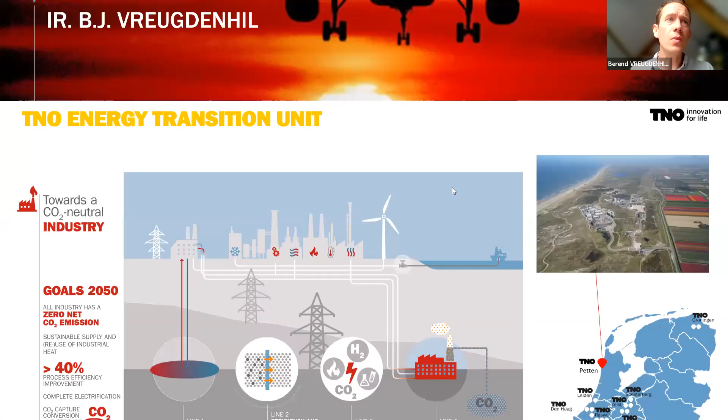One slide about TNO. TNO is a very large research organization, the largest in the Netherlands, focusing on many topics. My group is part of the energy transition unit, where we focus on a CO2 neutral industry via various lines within my group, which is located in Petten. Within the flower fields, we focus on using biomass to replace fossil resources, and this can be in the form of heat, fuels, and chemicals.

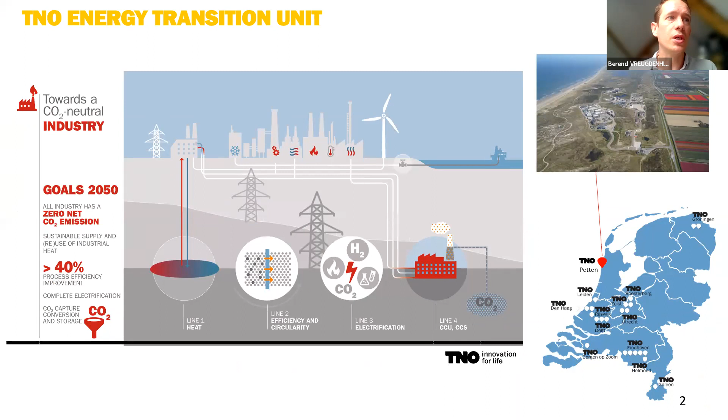So, as I said, the topic of today is gasification towards Fischer Tropsch. Gasification is, I believe, a workhorse for the energy transition. IEA Bioenergy published a report at the end of last year where we investigated how gasification can be applied in existing infrastructures, so existing industries, to convert them into biorefineries, utilizing their own waste streams, co-producing additional products. And one of the proposed pathways there is a Fischer Tropsch pathway.

But it's a key technology in utilizing all kinds of undervalued resources, from agricultural waste and forest residues to municipal solid waste and even plastics. It can be applied in many different industries: power generation, refinery, steel making, but also for fuels and chemicals. We believe that gasification is a crucial technology in reaching large shares of green gas in the European gas infrastructure, which is really a hot topic today.

As a technology, it can also be used for developing the bioeconomy, where you focus on using biomass to produce fuels, chemicals, energy, but also the circular economy. When you talk about municipal solid waste, you take in plastics, and gasification allows you to convert plastics back into the building blocks of plastics, so you can make virgin plastics again. And the last topic, it's also a key technology in the production of sustainable aviation fuel, SAF, via the Fischer Tropsch pathway.

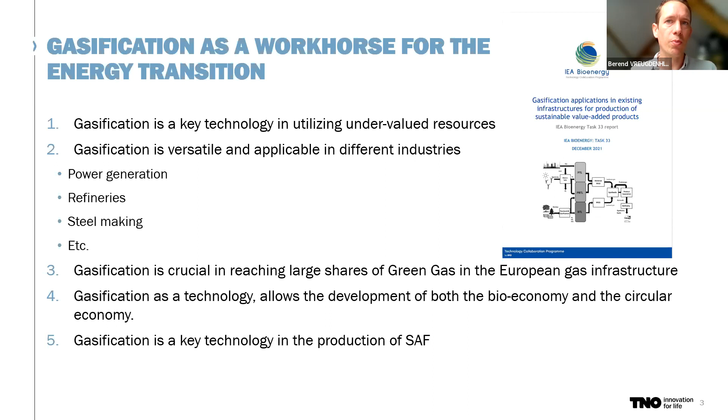I think many of you will understand the problems we're facing with making all these sectors renewable or sustainable. There's a huge challenge there, especially in the hard to abate sectors like aviation. It's very difficult to supply SAF in substantial quantities. The report in the top right is written by my colleagues from TNO. Basically this also underlines the importance of biomass approaches, not only to supply sufficient quantities of fuels like Fischer Tropsch, but also to be cost effective.

They evaluated the various routes and compared biomass pathways to power to X, so using renewable energy, and compared it to fossil-based products. It's a very nice report. But what it states is that e-based systems tend to be 2.5 times more expensive compared to bio-based routes. So making all these products from power to X is going to be very costly, and the sustainable electricity is not yet there. So that's a huge challenge.

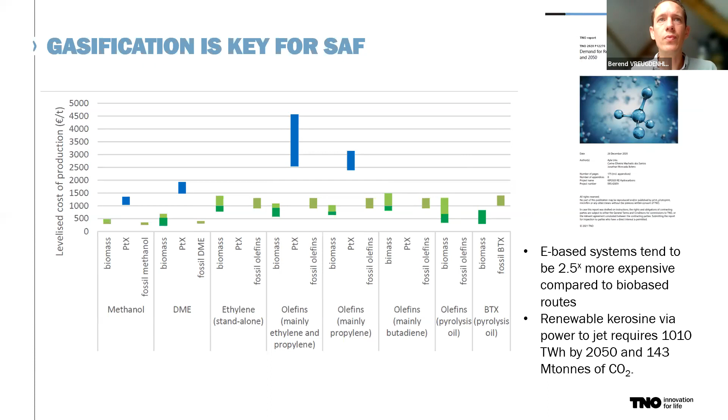It also mentioned that if you want to make renewable kerosene via the power to jet pathway, you would require 1,000 terawatt hours by 2050 and 143 million tons of CO2, which is also a substantial amount. And the good thing is, in biomass, you have both a lot of carbon and a lot of hydrogen. So it's an excellent pathway to go to Fischer Tropsch.

So going into the project, what I will be presenting is part of the BECOOL project. It's a collaborative project between the EU and Brazil. It's ending at the end of this month. What we looked at in this project with all the partners is the growth and cultivation of biomass, the harvesting, the logistics to get the feedstock to a plant, and then the thermochemical conversion via pyrolysis or gasification to go to Fischer Tropsch.

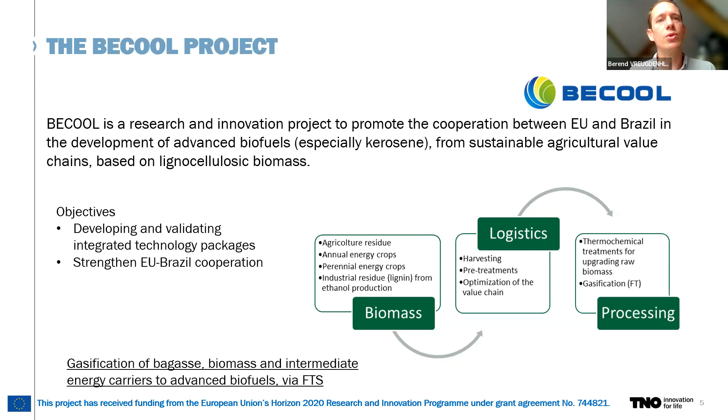We analyzed this with models, but we also supported it with actual testing in the fields and also in the lab with gasification tests. And TNO was part of the group that was looking into this thermochemical conversion, where we actually showed that you can convert biomass into Fischer Tropsch products, and the results were also used to validate our models.

So what did we do there? We had several routes that we looked at in the project. So pyrolysis, producing a liquid, and then high temperature gasification to produce syngas. But at TNO we have an indirect gasifier, which is more medium temperature gasification, and we focus on utilizing the biomass directly, making a product gas, so not a syngas. It's rich in tar and methane.

And then after removal of impurities with tar removal or a water wash and hydrodesulfurization, we would go to a steam methane reformer. So make syngas out of the product gas, remove the CO2, and go to Fischer Tropsch, where we produce the liquids. The economics, as calculated by IEA back in 2019, would be between 20 to 40 euros per gigajoule. And in our approach, we reached the high end of that specific range, and that's without any learnings so far.

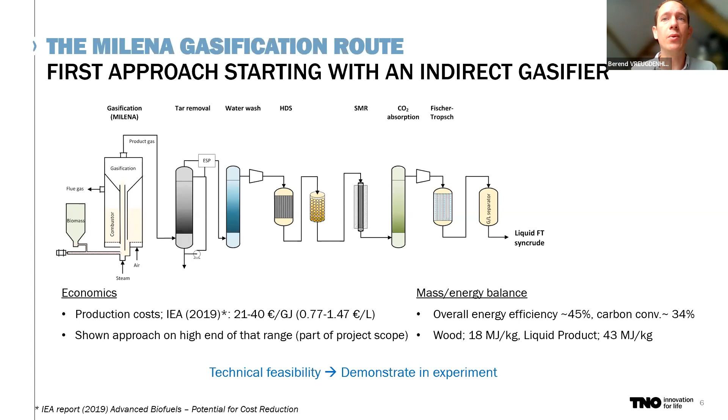Looking into the mass and energy balance, the overall efficiency is about 45%, and the carbon conversion 34%. And this is quite typical for Fischer Tropsch processes. So what we did is we demonstrated with experimental work that it's feasible, that it's possible to do this, and it's actually quite unique. So I will show you the lineup that we have.

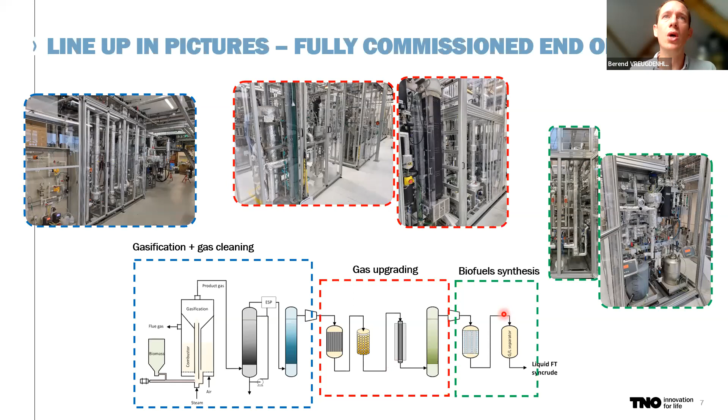Part of it was existing equipment, so the gasification and the gas cleaning and part of the gas upgrading, but everything from the steam methane reformer from this point forward, the CO2 scrubber, and the high pressure fuel synthesis, that was all newly built and fully commissioned by the end of 2021. So it wasn't tested before. And within the BECOOL project, we actually had 2 weeks of running an experiment to demonstrate this.

So what we did there, with quite a big team of people, we gasified first beechwood, which is our standard starting point. So we operated the gasifier, and in the meantime we prepared the upgrading, so the cleaning and the conversion, the steam methane reforming, CO2 scrubber, in order to get a syngas of good enough quality. And at the same time, we were starting up our fuel synthesis part with gas from the grid, and eventually we connected it to our gasifier, so on biosyngas, and demonstrated the feasibility.

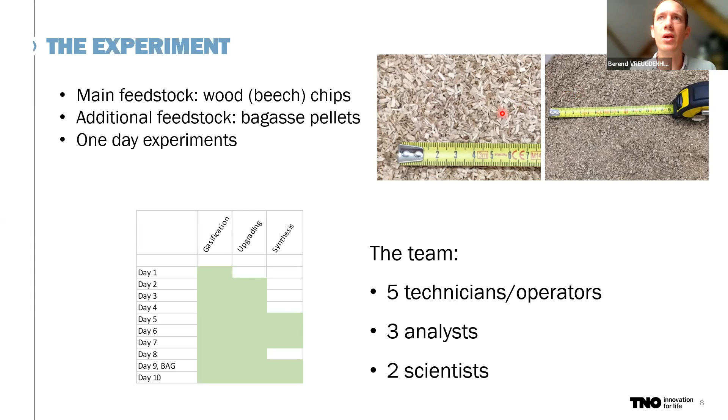Then part of the collaboration with Brazil was also to look into bagasse, which is an abundantly available feedstock in Brazil. And we had some pellets available, and on the 9th day we operated on bagasse and demonstrated that it's also feasible to use bagasse as a feedstock. And you can see in the top right the quality of the feedstock, or the sizes, and that's typical for our lab scale experiments. You need a good size of feedstock in order to be able to feed it.

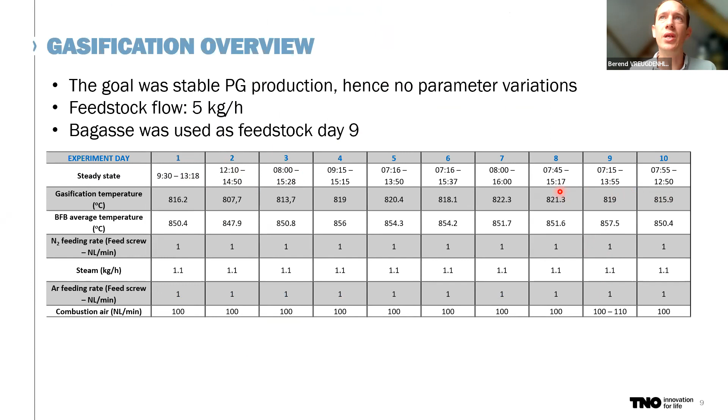So here you have an overview of what we were doing. You see some days were longer, some days were shorter. Sometimes you run into problems and you have to solve those. Typically every day we operated on 5 kilograms per hour, and on the 9th day we ran on bagasse pellets. Our gasification temperature is roughly around 820 degrees C. And we try to keep everything constant for the duration of the 2 weeks.

So this is some of the results on gas upgrading. You can see after tar removal, so Milena, Olga, after tar removal, you see a typical gas composition. It's rich in CO, hydrogen roughly 20%, and there's still some toluene and benzene in there, and ethylene is quite high. Then after the gas cleaning, which is the hydrodesulfurization and sulfur removal, what you see happening is all the unsaturated hydrocarbons get saturated, so the ethane content increases.

There's still some benzene and toluene in there, but after the methane reformer, where you make syngas, all these components are destroyed and syngas is produced, after which we remove the CO2 in order to have just the syngas going into the Fischer Tropsch. And you see the CO2 is completely removed in this case.

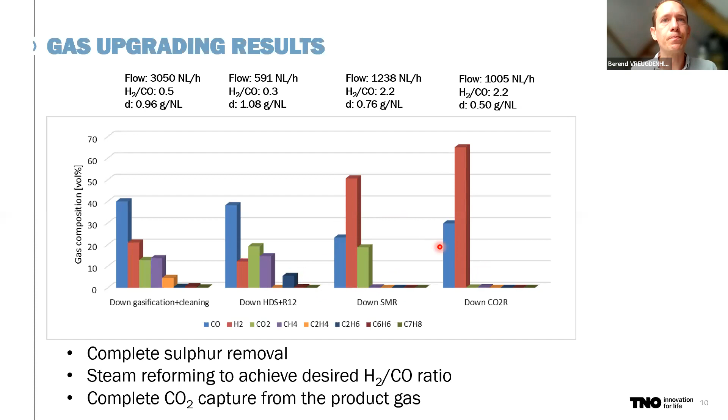So going into the Fischer Tropsch pilot unit, it's a reactor of 2.5 meters long with an internal diameter of 26 millimeters. It's externally controlled with a thermal oil because of the exothermal reactions taking place. Roughly about 1600 grams per hour of gas was going in, starting with the gas from the gas panel, and then later switching to biosyn gas.

And you can see at the bottom left the pictures, the Fischer Tropsch catalyst, which is a low temperature cobalt catalyst, and the silicon carbide pellets, which basically form the inerts at the inlet to get a good distribution and heat up of the system. And it's also mixed with the catalyst throughout the length of the reactor in order to mitigate all the exothermal reactions. If you would only have catalyst, then you would overheat at one point and probably melt your catalyst straight away.

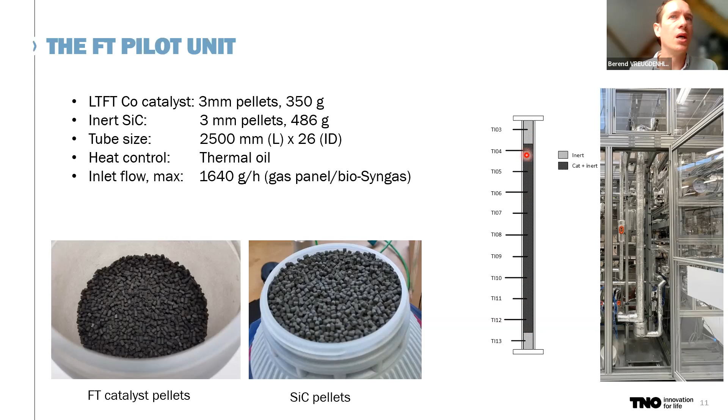Here you have some of the results on the 6th day. You see all the thermocouples, and it's going up. And when the gas goes in, you see exothermal reactions taking place with these peaks, and sometimes very high. And this is an effect of a change in gas composition, but also a change in pressure. So every time you increase the pressure in order to reach your higher pressure for your process, you see also that there's an additional thermal effect because more heat is developed locally with a compressed gas. So far, what we've seen is that the tests were running best at 8 bar G and roughly 200 to 220 degrees C.

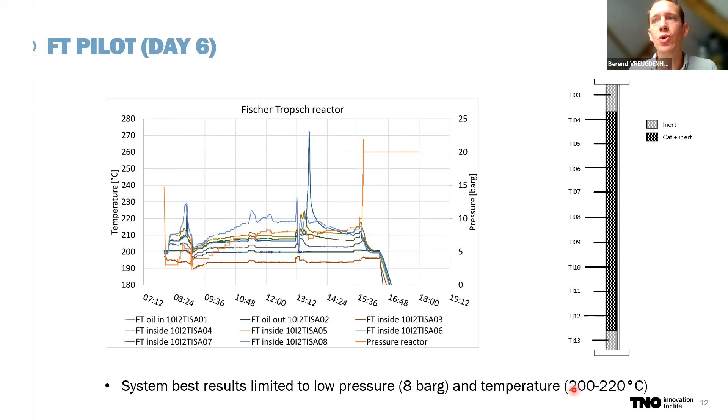And this is a little bit on the results. So we produced 3.5 liters of liquid/wax hydrocarbons. There was 600 grams per hour biosyn gas going in with a typical CO conversion of 34%. If it would be higher, then you would have a lot more heat developed, and you probably would need a different reactor type. The selectivity to C5 plus was about 80%, and methane was still quite high, but it's because the catalyst we used had a relatively low alpha.

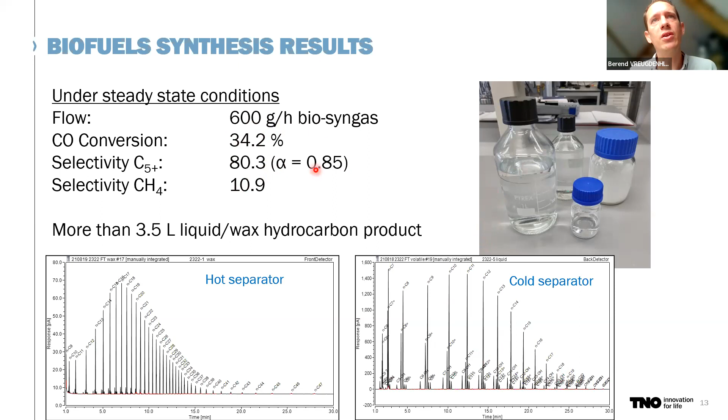So the experiences here, what we can conclude is that technically it has been quite successful running this complex system from all the units connected for the first time successfully. That was quite an achievement. We successfully converted beechwood and bagasse. We've shown that the gas cleaning is cleaning the gas to below ppm levels, so ppb levels. And that might still be not sufficient for Fischer Tropsch, but that's part of ongoing research.

We've also seen that the steam reforming was capable of reaching the right hydrogen to CO ratio, which was a question we had because we did not include in our lineup a shift reactor. So we had to do it in the steam methane reformer by controlling temperature and adding steam. We've seen the conversion there to be over 99% for the methane, which typically means that all the other hydrocarbons are also destroyed. The CO2 removal was actually perhaps a little bit too good, going to below 0.1 volume percent. And we produced a nice amount of Fischer Tropsch liquids and waxes in those 2 weeks.

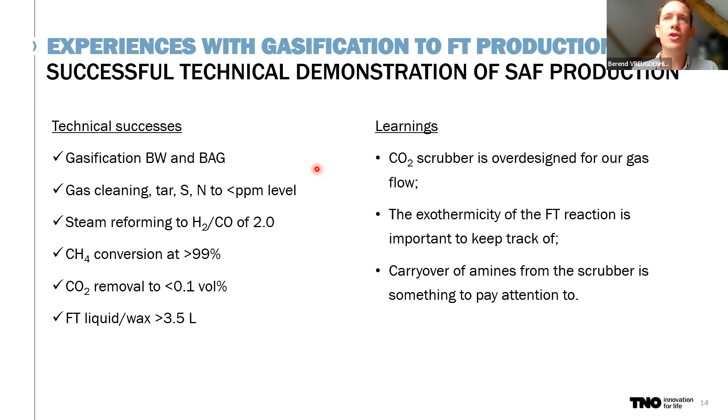So the learnings from this test, well, what we've seen is that the CO2 scrubber is over-designed because it's basically a 2-column setup, and the first column already the CO2 was removed. We've also seen that the exothermal reactions taking place in the Fischer Tropsch is quite tricky to keep in balance. And we've also noticed that there is a carryover of amines in certain cases from the amine scrubber, where we remove the CO2, and that's something to pay attention to, because that will definitely destroy Fischer-Tropsch catalyst if you do not deal with that.